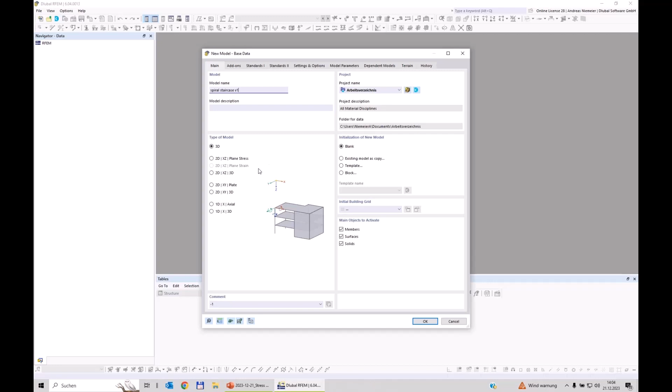Of course, we have to give this a name, so spiral staircase, let's say version 1. As type of model, of course this is a 3D model because we carry the loads around the pole, so I use a type of model 3D.

As task, what I want to solve in this model, I activate here the design add-on stress strain analysis, which takes over the calculation of stresses according to the internal forces and compares it with the limit stress of the assigned material. How this is done and how it's connected to the full model, I will show you in the following.

Here, of course, you can select more options. In this case, for example, I deactivate the load wizards because they are uninteresting here—they mainly take care of snow and wind, and this is not a case for our stairway.

In the next tab, we can select the standard of the load combination. You see we have a big list of available standards. I select here the Eurocode 0 with the CAN annex. Of course, you can select the country you wish here.

In the final tab here, I check that the z-axis is running downwards, which is common here, so that we can define the self-weights with a positive sign. Later we will use the option representatives, but I will explain it in detail. So now let's jump in.

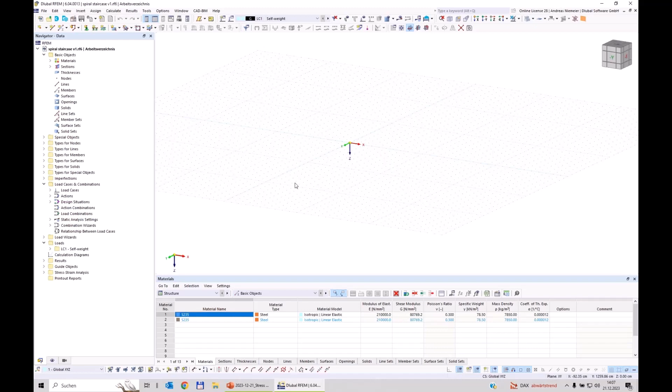For this, I use a member with member type beam and a section from a circular hollow section. As size, I expect something about 180 millimeters, so I type in here according to my table.

177.8, what is the outer diameter, and the thickness, let's say something with 10 millimeters. As I define it here in this box, the program will reduce the cross-section library only to these elements that fit. So I can select, for example, from this European catalog, this cross-section, and assign a material.

Let's check it. It's an S235 material according to the Eurocode catalog, so everything fine, and I can read here the properties, the stiffness properties, and the limit stress properties. So this fits, and we can confirm this input and jump into the 3D space to place this element.

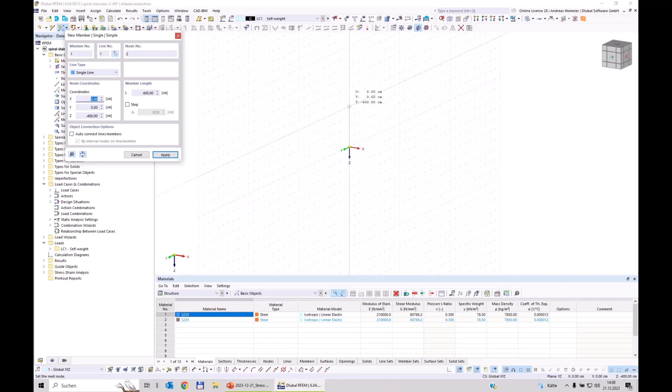I expect that this pole has an initial dimension of 4 meters, starting from the origin. I place the first point in the origin, and the upper point around about 4 meters. So now I have the pole inside, so it looks pretty easy.

I realize, what happens always, I have to connect it to my real dimensions according to my technical drawing on the desk. If you have to modify something, you can use the interaction of the navigator and the table below. For example, if we have to modify the nodes, you can pick directly the nodes, they will be highlighted, and I can set this should start 50 centimeters below because the foundation is more below the first stairway step.

On the top, you can also modify it if needed, so it's not 4 meters, but minus 380.5. This should show you only if you have special dimensions. You can change it in the table, but you can also change it by double-clicking the node if it's needed.

By the way, we just see here the material library with materials that are not needed, so you can select and remove them. It's the same for the sections, everything that is not needed you can remove.

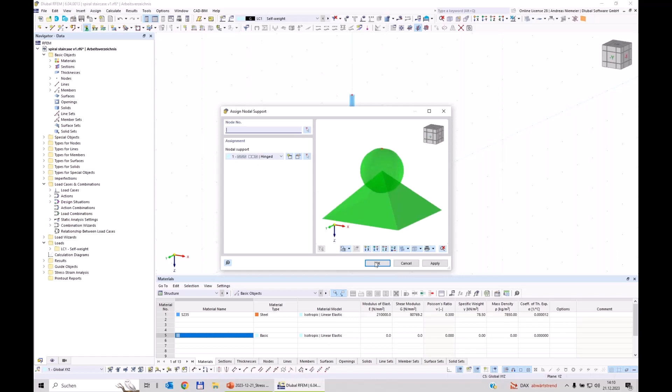Next, we should start thinking about how it's supported. In my point of view, we support the pole hinged on the foundation, so I use a nodal support. I use directly the first setting, what is supported with X, Y, Z, and with the rotation about Z. So we place this support here.

Next, we can think about how we can apply these prefabricated stair steps. These stair steps, maybe so you get a picture, it's this element here. We start by defining a level where we want to place it. For this, I use my working plane, and it's 8.5 centimeters above this point.

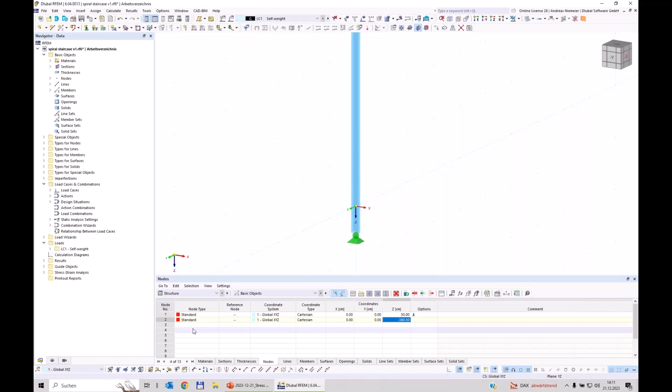I want to open the topic of how you can move your working plane 8.5 centimeters upwards. For this, I recommend you define a node and write here minus 8.5 centimeters. I get this node here in structure, and with this moving function, I can change the origin of this working plane, and here we can rotate it.

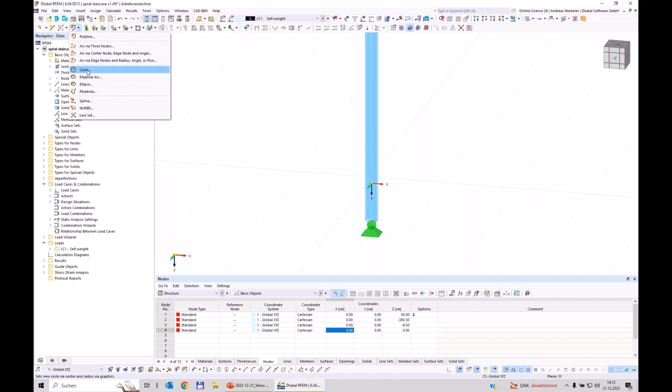Now you see it's on the XY plane, and everything I put in now is placed on this plane. So when I specify the inner and outer radius of this step, I know it's done on this plane. I use here a circle function, pick the center.

Place my node, for example, here on such a grid point, and write the inner radius, it's 9.7 centimeters. The program generates the line on the working plane. You can check it by typing in Y, and you see it's on this working plane.

Now let's generate the outer radius. It's 1.45 meters away. So I use a line, and it should start here in the origin and run to 1.45 meters in the X direction.

If you have nothing to pick on the end, please see this dialog here. You can specify option length and angle in work plane, and here I can write 145 centimeter length. You see it's already on my cursor, in working plane, and when I pick this function, I get directly a line with the length of 145 centimeters.

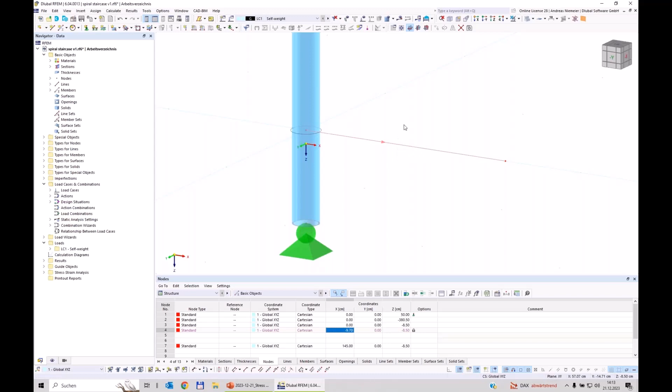Now this is the outer radius, this is the inner radius, and now we have to design or construct this stair step by a rotation of this node. So I use this line, rotate it by a copy by minus 8.5 degrees around Z, and this is the origin, and confirm this.

And in the next, we rotate this line back to, let's say, 70 degrees and confirm it. Now we receive with this action the corner nodes of our stair step, and these lines are only here to get this node, so I can delete it.

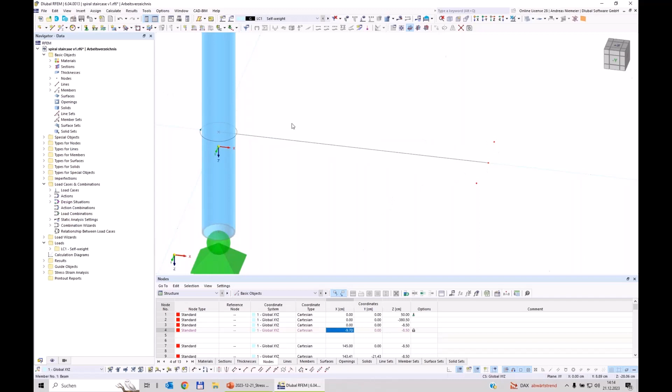In the next part, we specify the outer boundary, or let's say the place of the boundary member of the stair step. So I pick this node, and now I want to pick here this quadrant point of this circle line. And you see the program doesn't offer me something.

And maybe I lead you here to a new function in our program we inserted in the last weeks, months, such as a status bar with snapping points, with modification commands, with clipping options. But here I'm interested in this point, that I can find these quadrant points of such a circle. The same for the lower line here. And now I get slowly an idea of the size of this step.

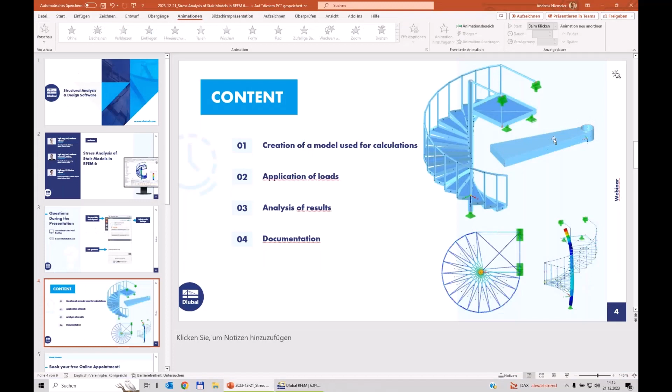On the outer boundary, on the right side, we specify an arc from these 3 nodes. And here, because we have this circular sleeve, I have only such a half circle. So I cut this circle with the definition nodes of the line and can delete this left part and get only this shape of the stair step.

This middle line we can generally delete, we don't need it, but I have one idea in the background why I need it. Therefore, I change it a little bit. I take it, divide it by 2 nodes, and delete the right and the left part. Why? I'll explain a few minutes later. I need it for controlling the coordinate system of the surface of the stair step.

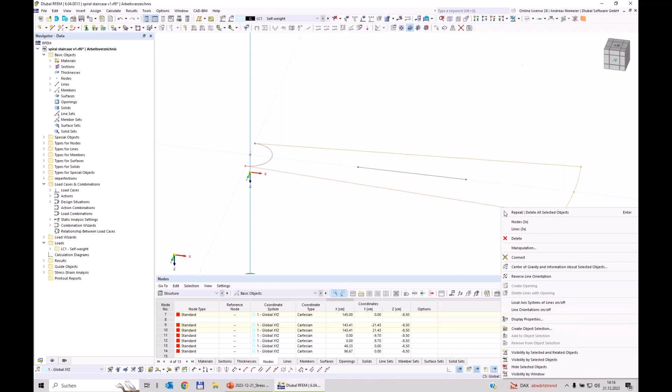So, but at first, let's assign to these lines a stiffness. So I select the lines, edit, and assign a member, and assign here a section. Let's make a new one, go to the library and say, let's say, a sheet with 120 with a thickness of 5.

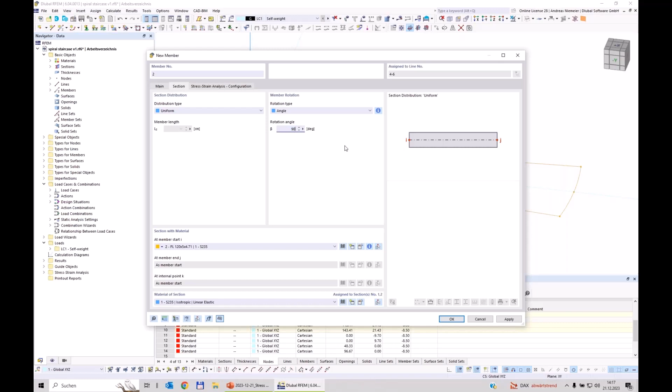And you see, when I write these figures, the catalog is reduced and I can select something, for example, this sheet here. Of course, because it's orientated on the weak axis, I rotate it by 90 degrees. And when I confirm it, you will see these lines get drawn blue. And when I visualize the cross section, you see I have applied this member stiffness roundabout.

Now in the next step, I have to connect the stair step with the pole in the middle. And here I use a rigid beam. It's an element that has an infinite stiffness. And I connect it also rigidly to the pole, because this circular hollow sleeve of the prefabricated step introduces a bending moment into the pole, and I want to introduce also a bending moment.

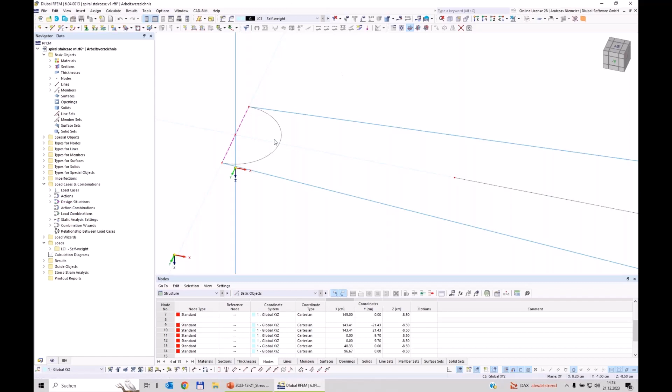I need this modeling of the step only so that I can carry the loads of the handrail through the step to the pole. So for me, it's only an option to carry loads with the right stiffness to the pole.

So in the next step, we have to take care how I can bring a load onto the stair step, because at the moment I have only members. And I plan to load these steps with a surface load, but right now I can look through, so I cannot apply a surface load.

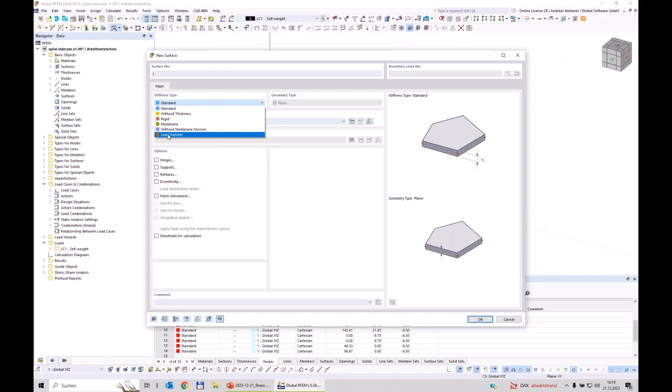So I introduce in this boundary a surface, and a special surface, because it's not a surface with a stiffness, it's only a surface that has the job to take up a load and distribute it to the neighbors. So a load transfer surface, we call it. And for this, I select these boundary lines.

And now you see we have an element inside. This element has an axis system. So surface, axis system, you see here. And if I go into the properties, I can say, okay, how should the load transfer between the axes be done? And I specify, please distribute loads between the short sides, so between this and this, so in the y-axis.

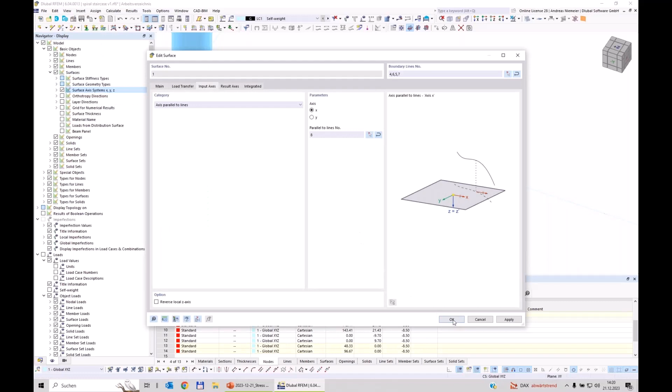So let's specify that this surface has a specific axis. So I control now that the X axis is always parallel to the controlling line that I prepared. At the moment, the question could appear, why is he doing this?

Because X is already running in this direction. That's clear. But imagine we want to rotate this step around the pole so it will move. So I fix it with this option.

In the next step, I say, please distribute the loads about the y-axis. So in this direction, only on these, let's say, supporting elements. And further, I specify this surface has a weight for the self-weight load case. So let's say 0.2, 20 kilos I apply. So far, so good.

We have now modeled a stair step, like a cake segment, which we can now in the next step copy and rotate around the pole. Of course, what we should not forget, we have also a handrail. So let's add directly a handrail. So I select this node, copy, create here a copy element.

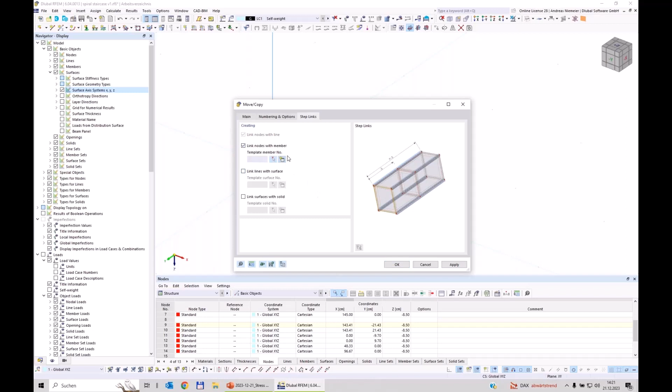I copy it up with minus 100 centimeters and directly create between the copied nodes, so origin, copied node, a new member where I say I use a circular hollow section, a new section here from this library, and it should have a dimension of 50 multiplied with 2, maybe here with 2.5 millimeters, from this steel, and confirm it.

Rotation at the moment not important because we assign it later. And on the left side we do it almost similar. So here I copied also up with minus 17 centimeters, a stair step height one time, by using also this member, and in the next instance we say minus 100 and without step link, so only a node here.

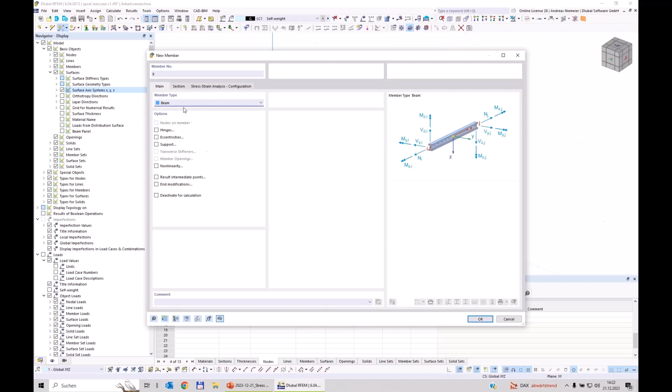Now we make to these vertical handrail poles also a horizontal handrail. I connect these two nodes. Now you can imagine if I rotate and copy it, it will connect it. The only thing I have to take care of with these planned actions is the coordinate systems, here for loading, maybe for later loading.

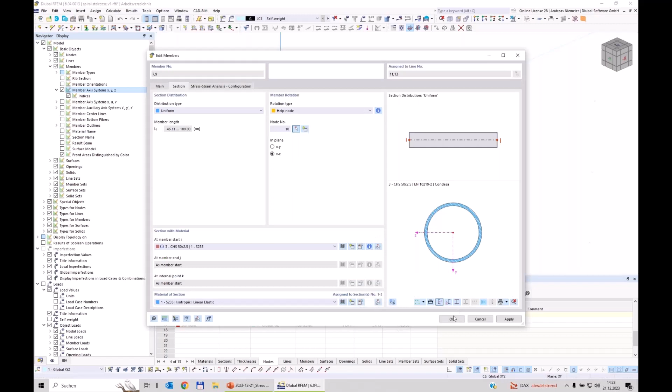So I go here, member axis systems, and you will see here the axis is running in this direction, here horizontal. So this is not really nice. So I select both members, edit, and go here to section, use here a help node, and define that this xz plane is pointing to, let's say, the neighbor node on this side. This means now the xz plane is rotating until it covers this node.

The same for the top member. Now for this we do the same. Help node, xz, and we use the node on the opposite side. So now I would say this stair step is modeled and we can start rotating.

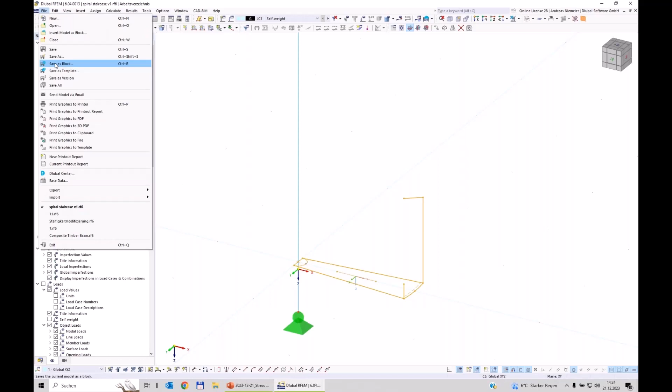But for me, this is a fixed component. It's a prefabricated component which I can replace and can play with. So I want to show you today a new modeling style. I want to show you how you can work with blocks. Therefore, I select this stuff here and save it as block. This I ignore because stress strain is not relevant here, and give here a name.

So let's say stair step. No, maybe with capital. And I specify, please save this below others, category other, general. Then I find it later. Now I confirm this setting. The program is thinking a while and storing it in the database, and now it's finished.

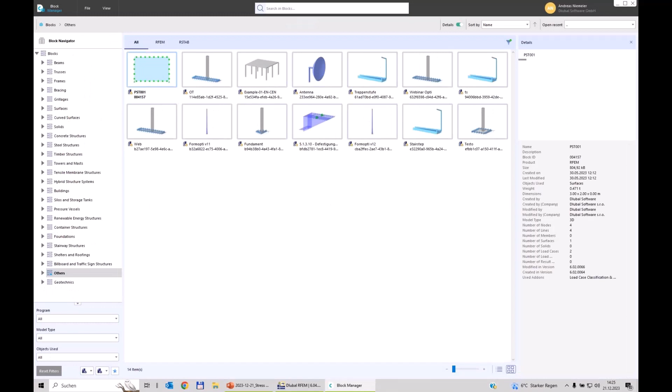In this situation, I can delete it now. I don't need it anymore, but I open the block library and I search it. It was a stair step, and you see I find it here. I see a 3D picture, and with double click I can take it over, but with a transfer menu which specifies where it's placed in space, do we have a rotation, whatever.

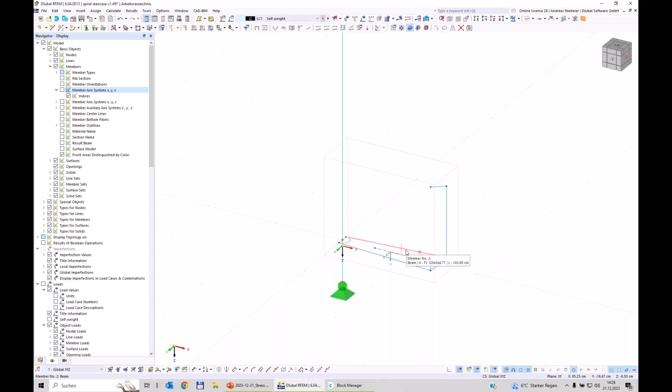I confirm it, and now we have the same step here, but if I draw my mouse cursor around, you see a bounding box around. It's now a block. This stuff is now inserted in the program as a special object, as a block, which is connected, and this means it also has these coordinates. You see, you get now such locks. It's connected to this stair step model block, which I can modify later.

And this allows me now also to select it here in the navigator and to say, please copy this block 16 times minus 17 centimeters upwards without step links, yes, and I confirm this. Now the program is not only copying members, nodes and cross sections, the program is copying a model in the model 16 times. So this eats a little bit of the performance, but you get some advantages later if you want to change something.

And this change I will show you when it's needed. So not directly during modeling, but when you go into design, it makes an effect if you can change it for one block in all blocks. So let's wait until it's finished.

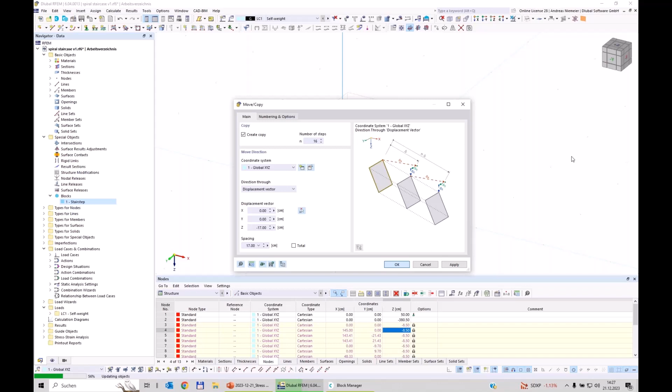Now, nice picture. All steps are above, you don't see something, but the lucky situation is we have every stair step separately here in this menu. So I can jump in and can now specify the position of this block in space of the model. So the first step fits already, the others not.

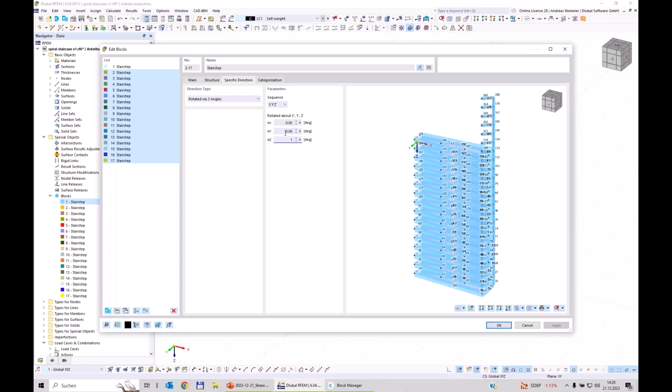So here I specify a direction. Open the menu and type in 1 degree. The question could appear, why is he writing now 1 degree? The point is, I want now to change the angle for every step separately. And if it only finds 0 in its definition, it will directly deactivate this option, but I don't want to change the menu continuously. So I use this trick.

And now we go to the second step and say, okay, we have a rotation of 17 degrees. And for the next step, we have, let's say, 2 times 17. So I have to calculate it. And of course, I don't write it down, but if I don't know it, I write what I want to calculate. So for example, 2 times 17. The same for this situation, 3 times 17. And now I jump through all, so let's say 4 times, 5.

6. This could appear like a little boring job, but I inspired our programmer already to make a moving rotation function, but at the moment I haven't. And I also want to show you how you can solve it in reality, even if you don't have a special function for it.

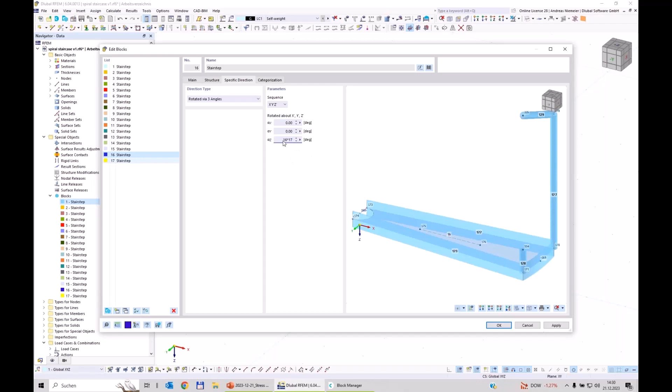And now 12, 13 times, 14 times, 16 and the last one. Now it's done. And let's check if everything is right. So I confirm the dialog.

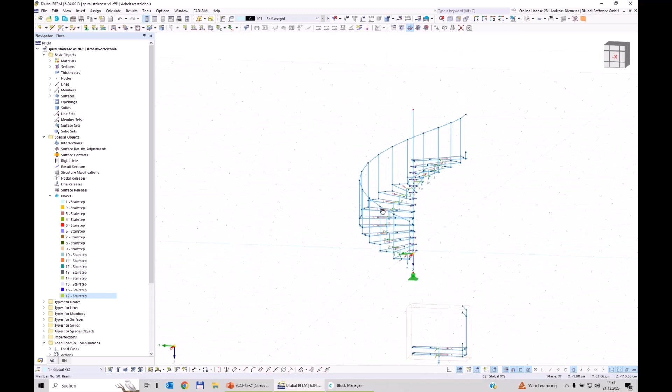And you see, the upper one I forgot, so this last one I have to check. It was, let's say, 15 times, and the last out here is again 1, and this is 16 times. Now, oh, I have to check why these last two are on the bottom.

Oh, I changed it in the wrong one. Sorry. Again a rotation. Now I have to change it in this menu, not here. So this was my fault. Okay. And the last one was 16 multiplied.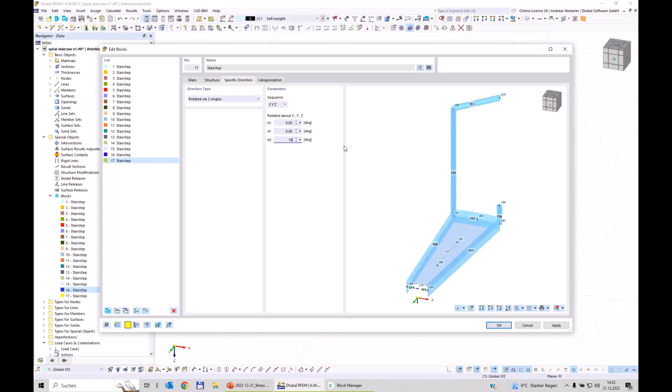Now everything fits. You see, we used these block elements to produce the full spiral stairway. This visualization fits also, and the connection to the pole is also done. In the next step, we have to take care how we can connect the upper level to the concrete structure. For this, I expect this last stair step will look a little bit different.

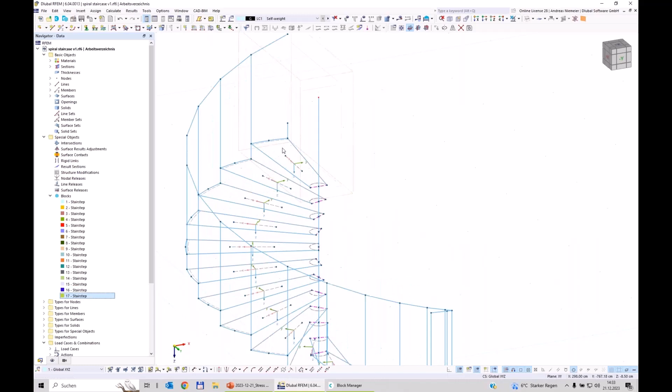I only use the placement. So I go here and explode it. And I get here now red nodes instead of these blue nodes that were generated. And I can delete what is not needed. For example, this stuff is not needed, we can delete it, but the fixation with the sleeve remains. We now use these geometries to model this level.

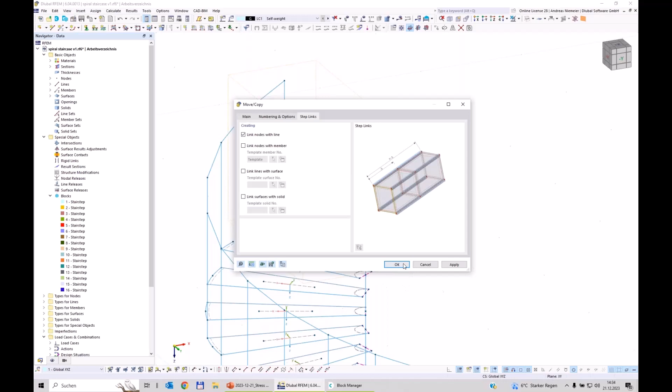So I copy these nodes one time in X, because we don't know the dimension exactly, with 50 centimeters, and create a line from it. And you see now we receive this level geometry, and I can place both nodes with the dimension of 145 centimeters. And when we get the view from top, you see they are ending directly at this place here.

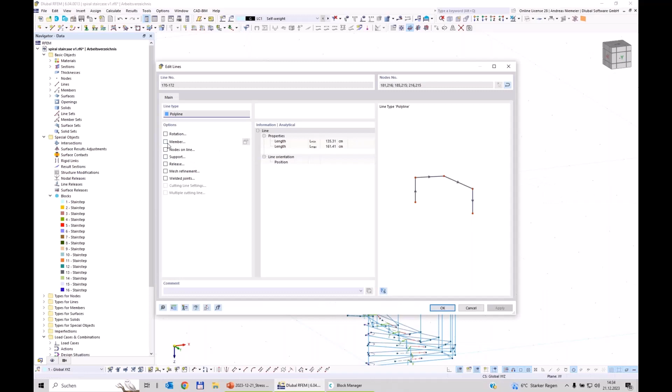And these nodes we connect now. So I use both nodes and have now a geometry of this level. And these lines are members, it's an L section. So I assign an L cross section by going to the library, and it should be an L section of 150 multiplied with 100, with a thickness of 10, and from this steel. And now we can remove this rotation,

and these lines get blue. Maybe this front member we can change also to the same section. It should be this L section. But the flange should show inside, so we take both and reverse orientation. And now it fits almost. We only have to make it a little bit more stable.

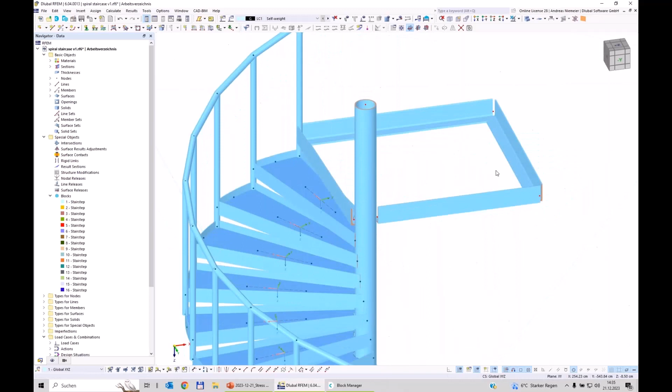So I insert a truss beam, which can only take tension forces, and assign a round solid bar, maybe with a diameter of 20 millimeters. And here I make a cross so that it's stiff enough to carry the upper part of this pole.

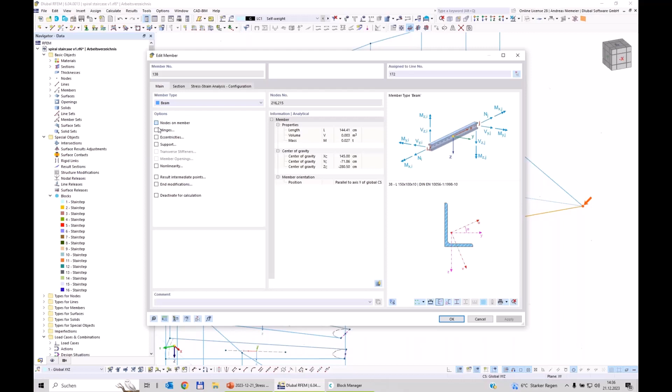So now we have to take care about the connection to the massive structure on the right side. I want to support this beam maybe 20 centimeters from the corner. So I double click this member, go to nodes on member, use absolute dimensions and say 20 centimeters at the start and 20 centimeters at the end. And you will see you get two nodes at a distance of 20 centimeters on the right and left side.

And here we can place a support. On the first side near the pole, we make a fixed support, and on the right side, we make a new support type, which we open in Y direction.

So I open this degree of freedom and place this support here near this node. Now, the structure is already finished. The only part that is missing is the handrail on top, and here, if I place a load, I can look through. It cannot carry a load, so we have to insert a surface here.

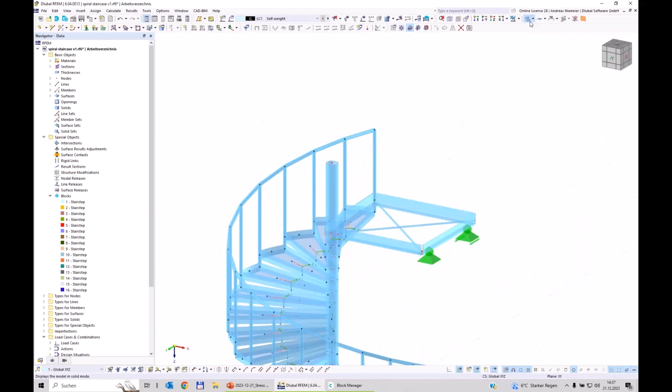And in this case, because the stiffness is deciding which part is going to the poles and to the supports, I use again a load transfer surface, but with the type isotropic finite element analysis. Of course, with a weight of 0.2 kilonewton per square meter. And I place this into this structure.

I know now when I run the analysis and there's a load on this surface, it will calculate it in a submodel, only this surface with all boundary elements, and take over the line support forces on these boundaries as new loads in the structure.

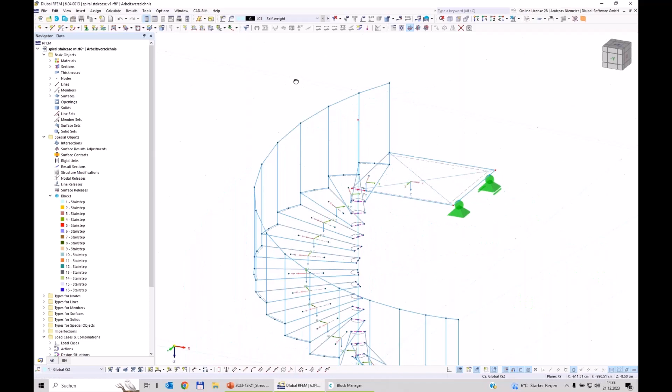Now let's finalize it with our, let's say, handrail. So I take these nodes by drag and drop, copy them upwards, and place here now a hinged handrail. So let's use here a beam element with a hinge. The section is our circular hollow section with no rotation, and the hinge should be used at the beginning because it's fixed afterwards, so it should not introduce a bending moment.

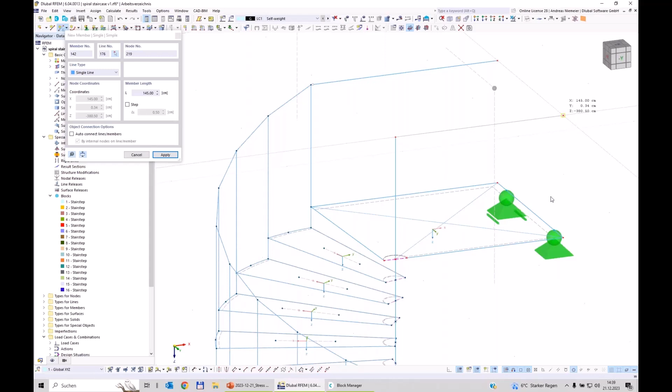And let's place it here from here to here, and the same from here to here, and fix it on the wall. For this we take a nodal support, a new type that is fixed against rotation about X, and Z is free, on these two nodes.

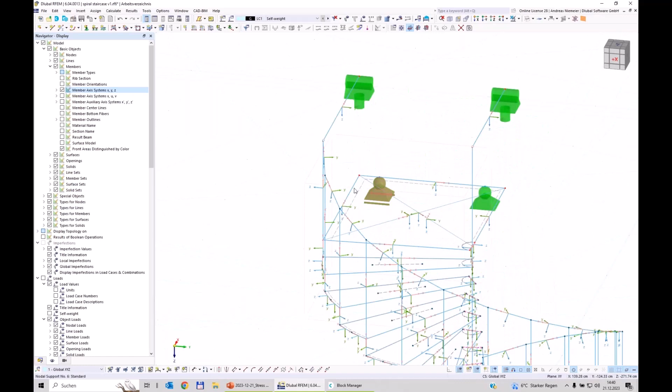Now we're almost finished. The only thing missing is, for example, the coordinate system arrangement for members. I aligned the handrail coordinate system in the stair step already. The only point missing is that all are showing to the inner side, so this will be rotated to the inner side by 180 degrees. Now we finished the part with the modeling.

I know it was a little bit exhausting, but I planned this modeling step to show you how you can work with the program and which features exist to solve such a structure. In the next step, we want to change to the loading. The self-weight load case should act. So let's check if we did everything right. For me, this is the best plausibility control.

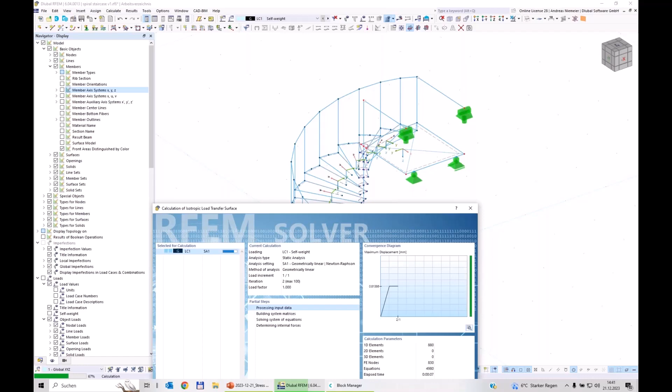So I run the analysis. You see this loading process. This is the sub-modeling process of this level that I used here. And then for the next calculation, it used the support forces of this level as member loads on the structure. And you see, we get the equilibrium, and we also get the deflection curve already.

Of course, you can visualize the deflection on the members in a better way, and you also see the weak point of the stair step. But for me, deflections are smaller than 1 millimeter, so everything seems fine so far. We did the modeling right and can now go ahead with loading.

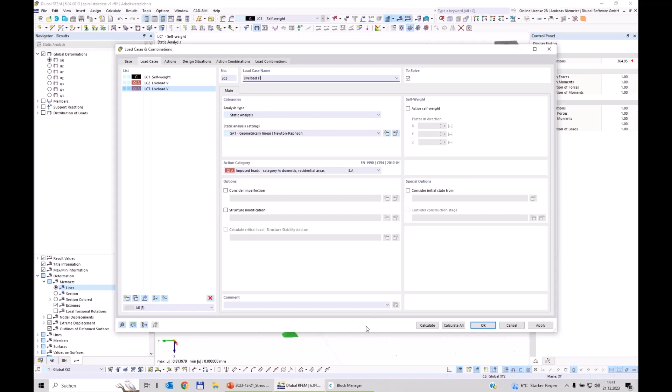For this, I create two load cases. One is a live load case, live load vertical, and the other is live load horizontal on the railing. For this, I apply load. For the vertical part, I apply 5 kilonewton per square meter. And this is now pretty easy with these load transfer surfaces, because I use a surface load, type in 5 in Z direction, and draw only a window over the full structure.

And you see, the program is applying the load on the structure, and these 5 kilonewtons will be distributed to the members around, and I don't have to take care of it now. The same for the horizontal. Here I only have to select the members. So I use a member load, for example in local Y direction, -1 kilonewton per meter.

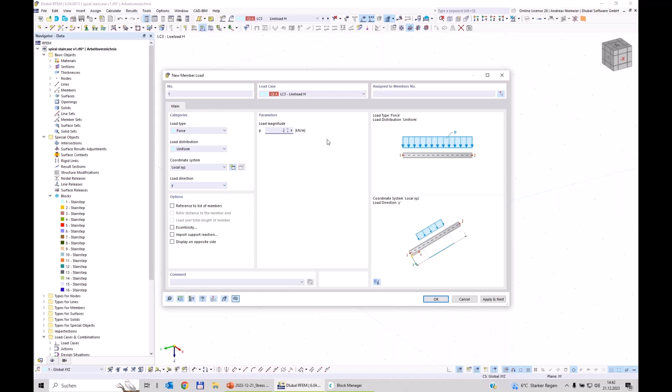And here I pick. If you don't want to see these bounding boxes, you can go into the display navigator and deactivate the bounding box. Oh, this is a wrong member. Now let's use all these members. Next time I will use separate cross sections so I can select them in one step.

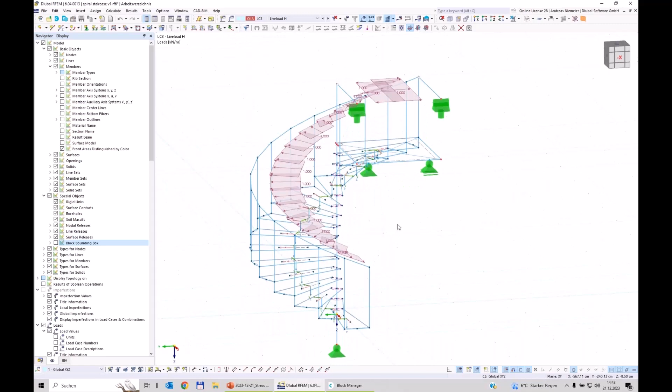And now we confirm it and get this load placed horizontally and three-dimensionally on this structure. This is a time saver if you have all coordinate systems already aligned. There could exist more loads, snow, wind, whatever, but this is not the point of this demo. I only want to show you that you can create different load types. The program is directly combining all possible ULS and SLS combinations, but I want to show you a little bit more.

We have these load cases. The program creates these, let's say, actions automatically, where it places these live loads with simultaneous setting. Then it has some, let's say, rules from the standard, from the code. And for this demo now, I only want to have ultimate limit state. So the others I delete.

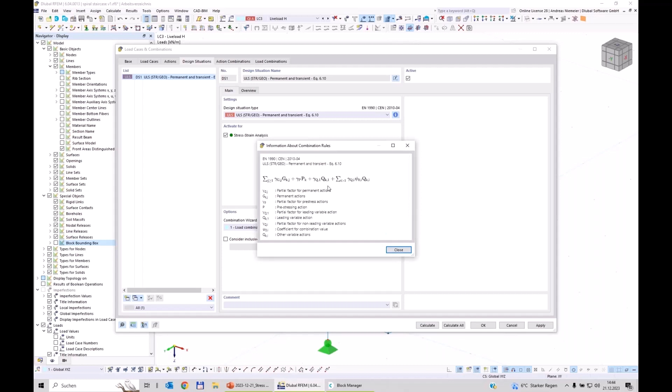And I want to design this design situation for stress-strain analysis. So if this design situation checks this stress analysis topic, the program knows, oh, I have to calculate the stress check for these members with this add-on. If it's not checked, it says, no, I only do structure calculation. So this is the decider here.

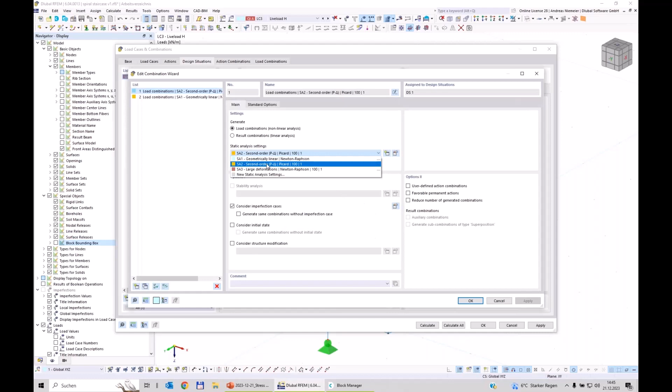And in the bottom, you can decide how the combination should be done: according to geometrical nonlinearity or only linear without imperfection? Then you select it here. And this means if you jump to the next tab, you get the actions combined and finally the load combinations combined according to linear theory with all gamma factors. And now we are ready to do a stress check. And this was everything we have to do, not more.

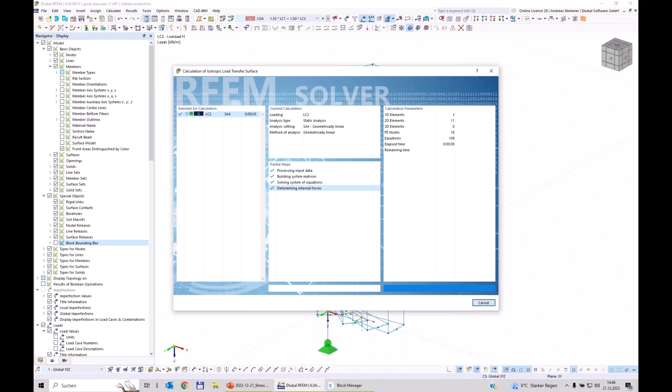So I now only do calculate all. And this task, which we defined in the first seconds of this demo, to activate stress-strain analysis in base data, is now considered. So the program is preparing these loads. Now this is the loading process of the transfer surface. Now it calculates the single load situations, the static analysis. You can read it here by SA. And after it's finished, it does a stress check.

And here we get a picture of deflection, but what we are interested in, you have to know we have stresses in every single load combination. You can visualize it here. For example, the normal stress you can activate here, and you get a picture of the normal stress of this combination. It will be visualized directly on the cross section, but it's boring to check every individual one. So therefore, we are always interested in the stress check, which makes an envelope of everything.

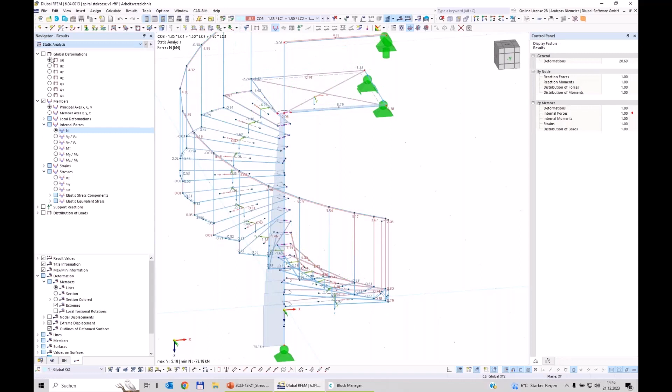Of course, drawing a multicolor picture on the cross section is difficult, but we visualize it then with such a diagram. The most important information here on the bottom: we have a maximum stress of 203 megapascal. Here you get a picture of the normal stress, the shear stress, the equivalent von Mises stress, compared to the allowed limit stress. So you get a utilization of around 90%. This is now also in the table below.

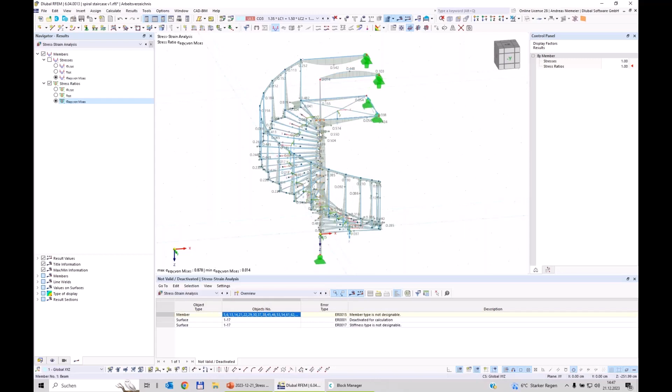And in the table below, you first get an overview from the stress-strain analysis. You see it had some issue with members. Member type is not designable. The question could appear, what is this? If you select it, the program will select these objects in the graphics, and you see, it's this rigid member I can't design. And if you select these surfaces, deactivated for calculation, it's this transfer surface. It could not be designed because we have no properties for it.

But if you go here to stresses on members, you get a result in different sheets. Stresses by design situation: we have only one, so you get the biggest stresses for this design situation. Per loading, we have 4 load situations, so you get the biggest result per load situation you applied. Per material, it's many, because we have many materials from the many steps we copied. This we will solve in the next steps, but at the moment it's not so optimal.

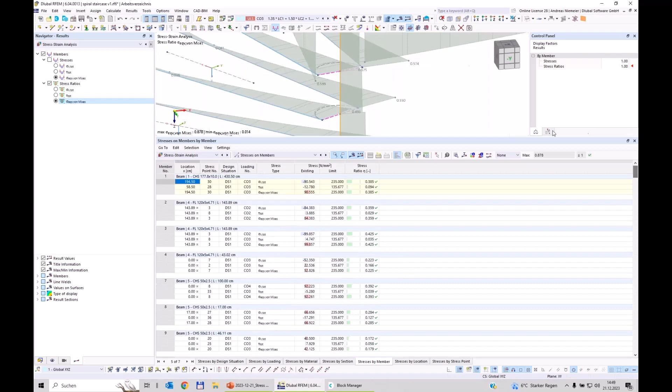By sections the same. By member, you see we have how many? 142 members, so 142 rows. Pretty boring. Imagine you have to document it and make a document from it. So what we can do is jump again to base data and make a grouping. And the grouping could be done with the member representatives. If I activate it, the program will delete the result, of course.

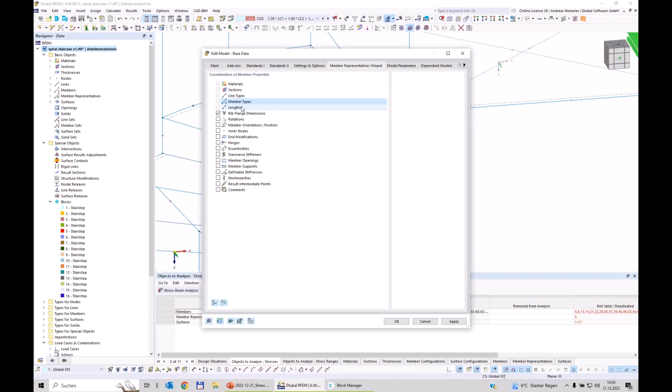But what happened? I now get member representatives here, and you see it's again 107 representatives. So nothing good. These representatives are always a group of elements which have the same materials, the same sections, the same line types, the same member types, the same lengths, and all properties I defined. But it's 107. So what can we do?

And this is exactly the point where we should think about the mother-child logic in blocks. So I jump again to the blocks and say, hey, we have 16 similar blocks. Can't we say 2 until 16 are ruled by block 1?

In block 1, I can specify to use for all sections material 1. For section 1, let's say section 2, and for the circular hollow section, let's use the last one, so this one.

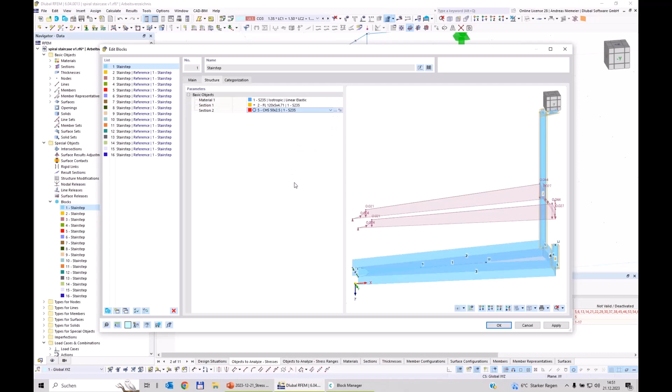If I confirm it, the program will sum up everything and our representatives melt down to 16 positions. What happened now? The program found elements that belong together.

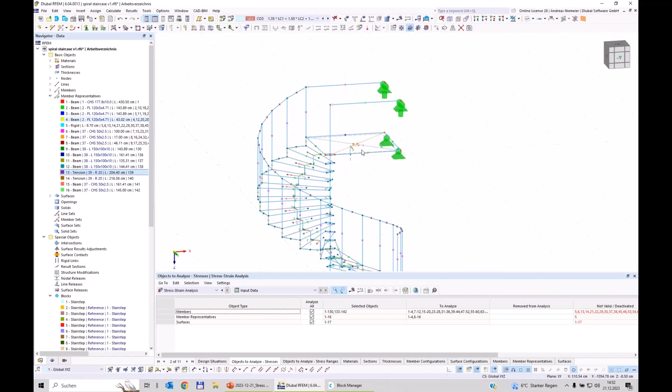So we have one position, the pole in the middle, you see what is highlighted. We have one position, maybe the front border of the steps, the back border, the outer, the rigid members, the vertical handrail poles, these step poles, the handrail, these L sections, this bracing, and maybe here this handrail with individual length. So we have 16 unique positions now.

If we give the stress strain check the job to design not all members and surfaces individually, but only representatives, we get in the design finally 16 positions, which is nice to read for your clients. So you see all poles of handrail, all stairway steps, whatever. You have a clear grouping of elements and you design only 16 positions.

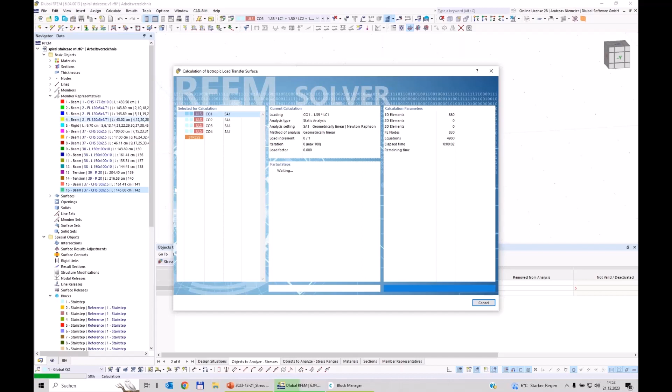Let's see what happens. We calculate the load situations again because we reassigned many cross sections. Now we get in the result stresses on representatives, a really nice table with 16 rows. Here you see which member numbers belong to which representatives and what is the biggest result of it.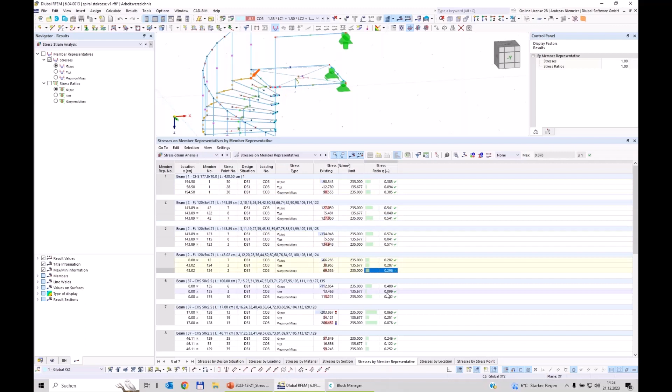This is a really good table to document. So if you have to make a documentation, you can say let's make a printout report. In the printout report, I want to see all basic data, material section nodes, blocks.

We want to see type for nodal supports, that's okay, line supports I haven't, hinges is okay, surfaces not needed, load cases okay, load combinations also maybe with a reduced description, loads, guide objects I don't need, part lists I don't need, static analysis setting only summary.

Stress analysis we say okay, cross sections and material already documented on top, so only show results, and as results we take a table of stresses on member representatives, so what we just saw, and a design overview is not needed.

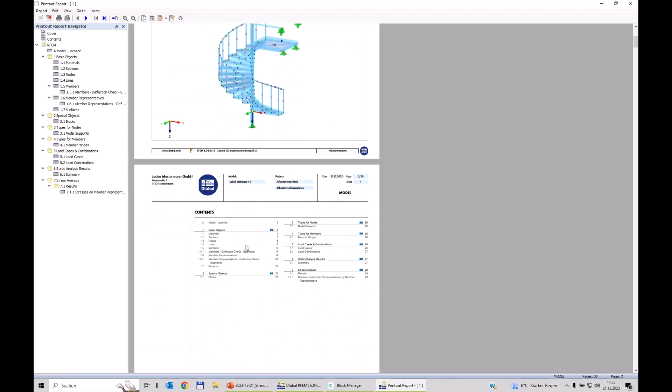Let's create a document from it. So you see I only checked a few options without much work, and you get a full document created. Where is it? Here, it's coming. So you get a document with a header, with a chapter description, with a preview model, with content.

Description of cross sections, nodes, lines, members, and here surface descriptions. So all data we fed into the model, a summary of loading with the biggest deflections, and finally stresses on member representatives.

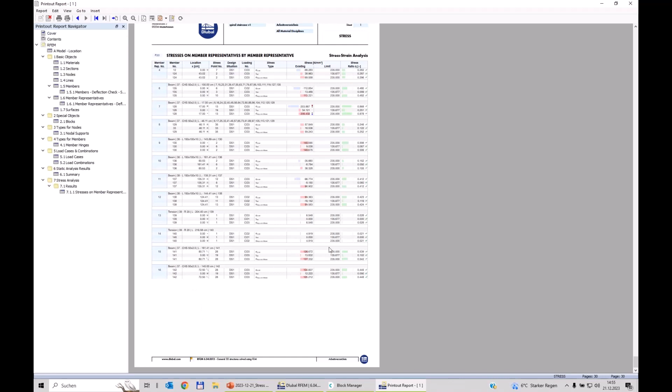By member representative table, this is 16 rows with the biggest results. Of course, this is pure table stuff, but you can enrich it now with pictures also.

So we can take our model and say please show me, so the program automatically generates representatives here. Show me first representatives on model. On this result, we see this result, and... no, why don't we see it? What is wrong?

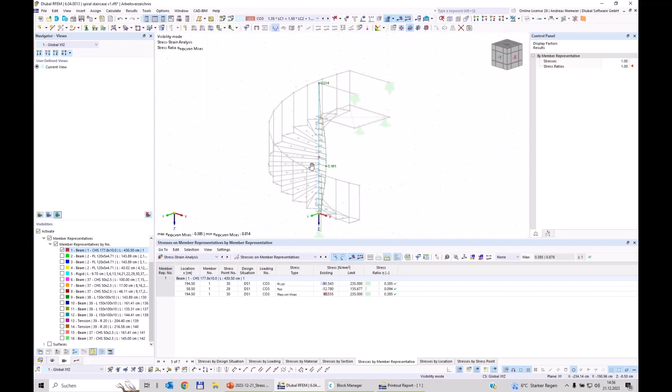Beam 1 again, this is object now. Now you see the utilization on this curve. Of course, we can use here also member visualization results without diagram. You see here such a multicolor gradient with the biggest utilization in the middle.

With this information, we can now print pictures. We say print this picture, let's say window filling, with a height of 50% of the page into the report. Okay.

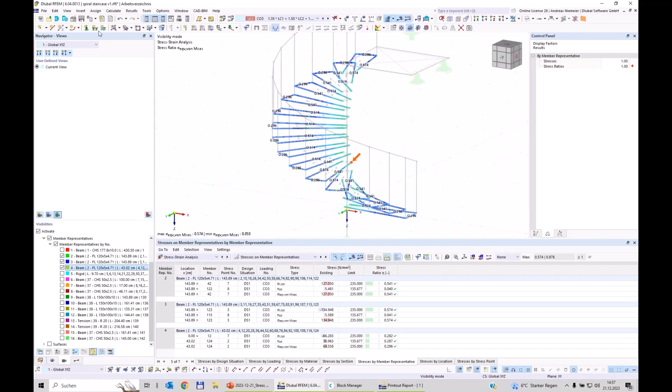Then you can jump to the next and say next representatives. Let's say right border. Maybe you can sum it up with the back border and the lateral border, and maybe print this from the top view. Isometric is better, make a picture and go to the next pictures.

It was maybe these rigid beams that are uninteresting. This handrail pole, print a picture. So I can go through all and make a queue of pictures into the report. Of course, I don't want to show everything, but I want to inspire you how you can do it. And this is connected to this table, so your reader of the document understands it.

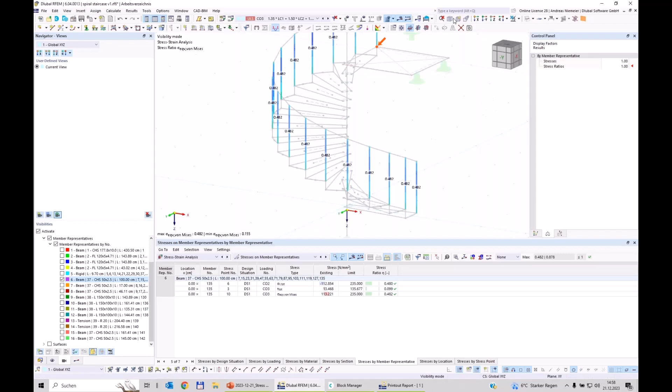So this is the way of documentation you can do. Of course, when we see now our structure and see the biggest utilization is here, almost 90%, a question could arise: this is only stress check, what is with buckling, stability and such things? Yes, I agree, you should think also about such things.

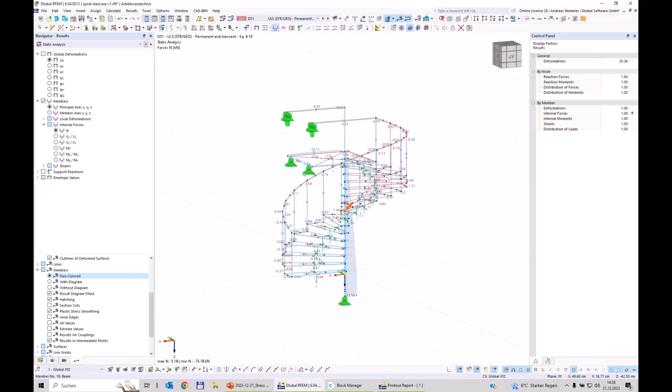And when I check now the normal axial forces of such a structure, you will see we have up to 73 kilonewton pressure in one element. If you check it, you see it's mainly this pole in the middle.

I calculated the eigenvalues, and it has buckling values bigger than 10, so it's not a problem. But to check it, I can use the structure stability program to check the eigenvalues, or use the steel design program.

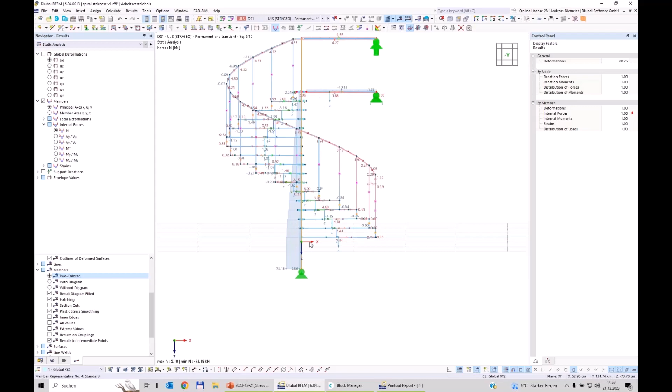So if it's needed to make a further check, the program offers you to activate it. We can say, okay, please make a steel check. For this vertical column, viewed from the lateral side, you see it's hinged here and fixed on this place, also more or less horizontal.

So I use a pendulum column idea between these two situations. I place a node on this member. Then the program wants to delete the mesh, and now I can pick this member, go to design types, go to effective length, and say please check buckling about both axes, torsional buckling, lateral torsional buckling.

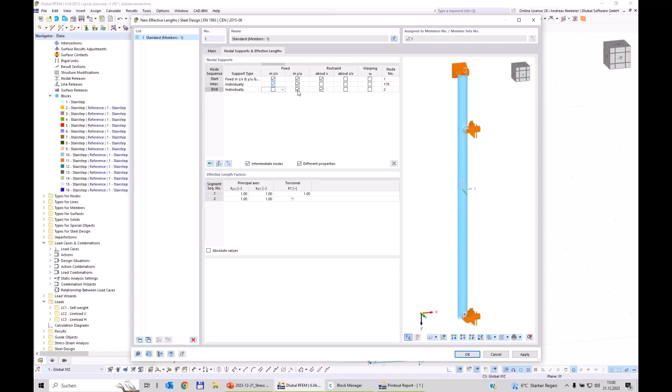I'm not afraid of it because it's a closed cross section, but it should get properties from this element. We have a start, an inner, and an end node. The first node is on the bottom, so the second is here. We fix it horizontally here, and on the top we assume nothing. This setting we give to the steel design.

Now we open the steel design. Of course, we can calculate everything, but let's check only this member in the middle, which has the highest normal axis force. If we run the analysis, we hope we will get an approval.

Here we run again through the full process about loading, load envelope for the load transfer surfaces, and now the load combinations 1 to 4.

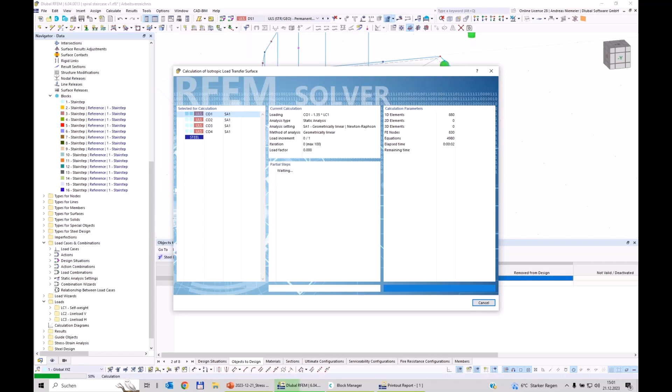You see now we get a utilization curve about this member we checked. The biggest result is almost 40%, so the plausibility is also okay. This top level is not loaded much, only here at this top.

And if we go to the checks per member, you will see it did a lot of cross-section proofs, so compression, torsion, shear, and so on. But this is covered with the stress check, I would say.

And for stability, we have flexural buckling about Y and Z axis, and bending and buckling according to the 6.33 check, and we're about 40%. Of course, you can see it here in detail how this check is made. If needed, you can open the hand calculation in this detail window. But for checking the structure, this is quite easy.

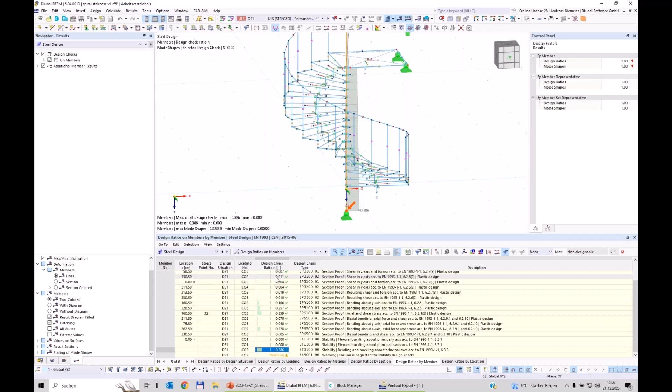I think this was my intention to show you, and this is how I want to close: how you can take such models and solve them with RFEM quite efficiently using this block technology and the different add-ons. And with this, I give back to Andreas.